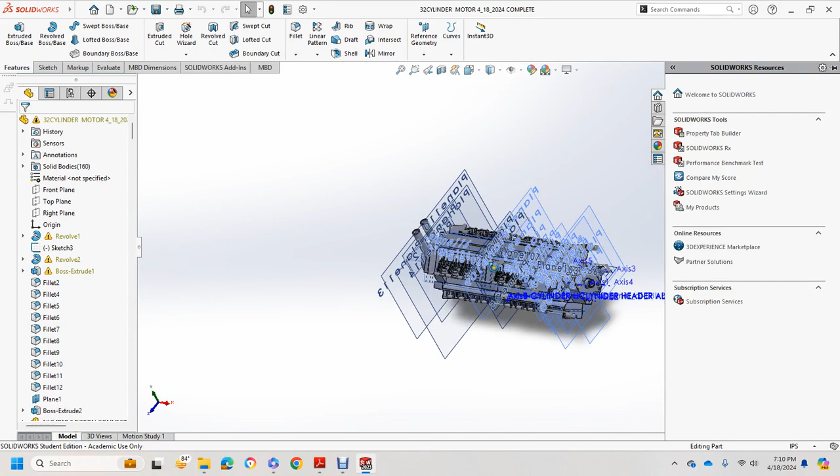Alright, hi, welcome to my X-type motor for a diesel engine locomotive. It's 32 cylinders, 8 cylinders on each bank, 8 cylinder length bank. Each head block has 8 cylinders.

Zooming in on the front. This is upright position. Scavenger highlighted in orange here. Scavenger, timing pulley belt, water pump over here on the other belt. These are the pulleys on the corners. The cones are turbochargers. This link path right here, that's orange.

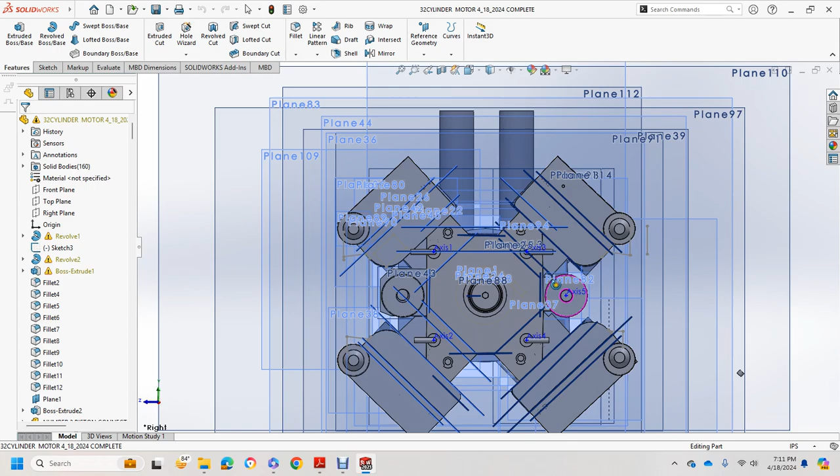A little line goes into the head bank. Those are turbochargers, they take the turbochargers into the air intake manifold. So here's the governor in the front, and then we'll show you what the governor looks like. This is the governor, we'll look at the cross section now.

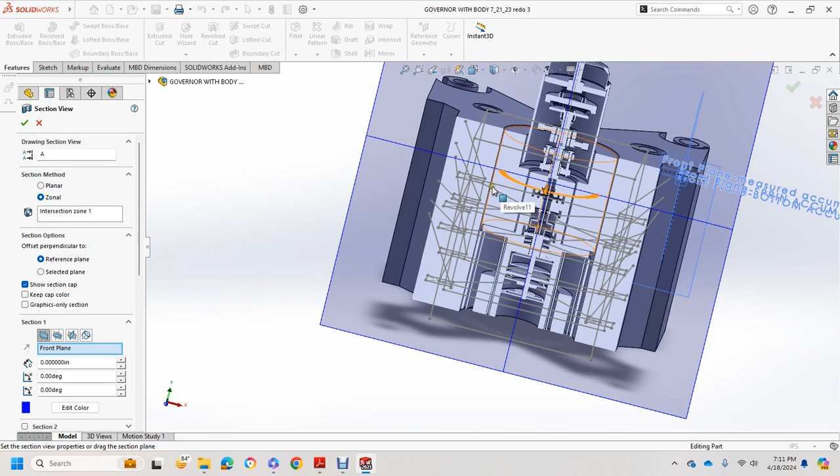So this is the middle, and we have the stem, and then the accumulator pistons come in these oil paths, and then they fill in the oil. There's a workaround float, and then it goes over here and fills with oil. And this is timing spring belts.

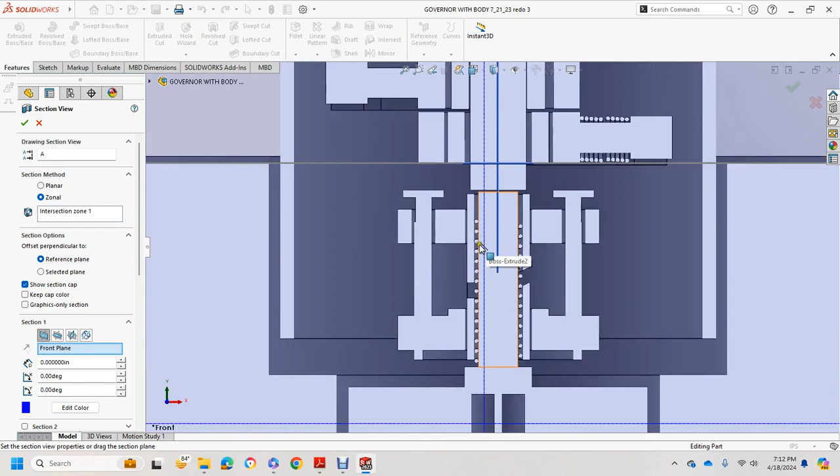You can see the springs, and then these are flyweights, and then this is a pressure crank-case regulator adjustable by this nut right here. And then on the drawing you see 4 control stands.

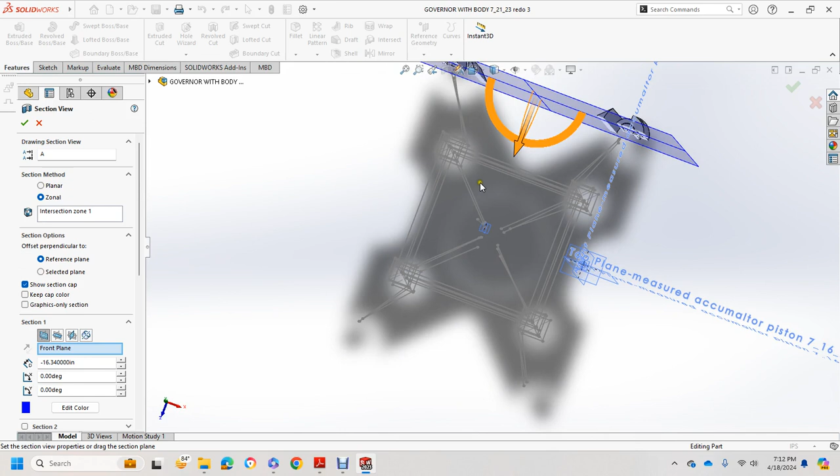They go over the X-type motor, and then you can turn the square off, so there's no more fuel going into the center, which is also for the throttle linkage control.

So over here on the more right, it's a little bit different incline. You see the accumulator pistons, power piston, the different blocks and the sleeves. And then we're going to go back to the X-type motor.

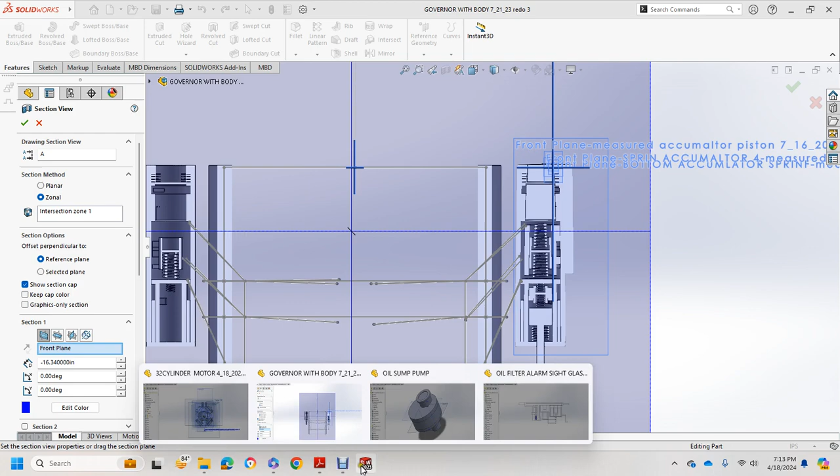I gotta close out of section view before it does that.

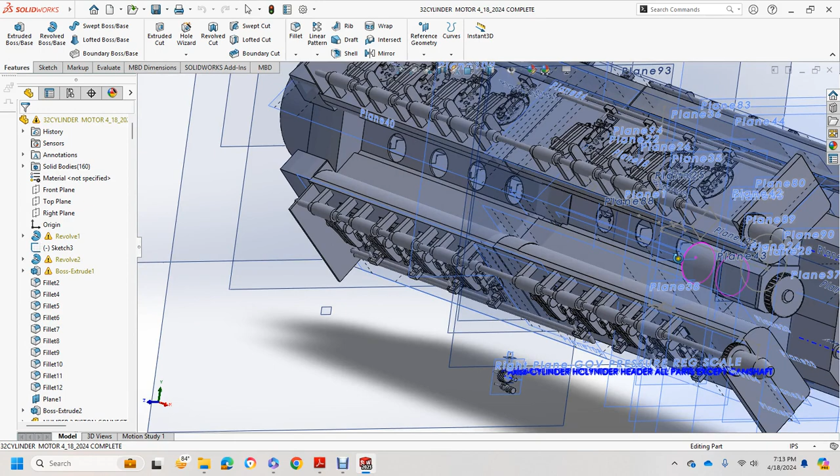Okay, so here's the X-type motor. It's got cylinders over here, water gear. This one on the left is the oil. This one on the right is the water, and those are going to fill each of these wet banks.

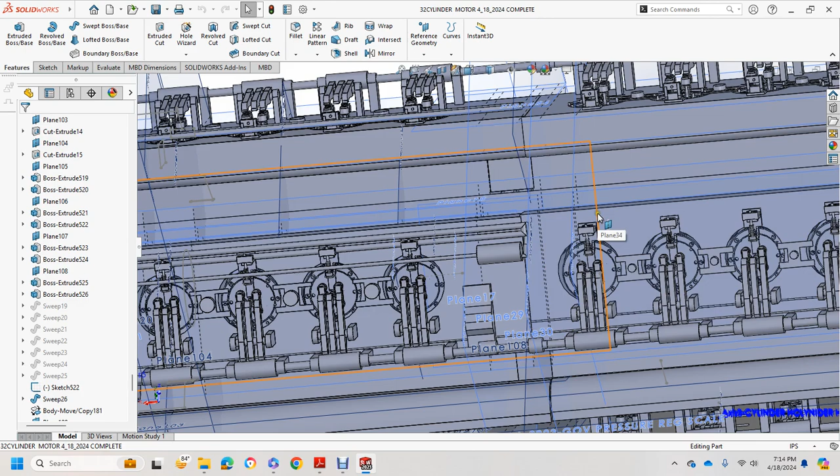And then you have your camshafts, rocker arms, crab bolts, rocker arms, springs. This is your throttle linkage right there. And those are done 4 times over.

And then we're going to look at the back. This is basically another way for the combustion to go out the exhaust tubes. And then this is the drive, it adds to a coupler.

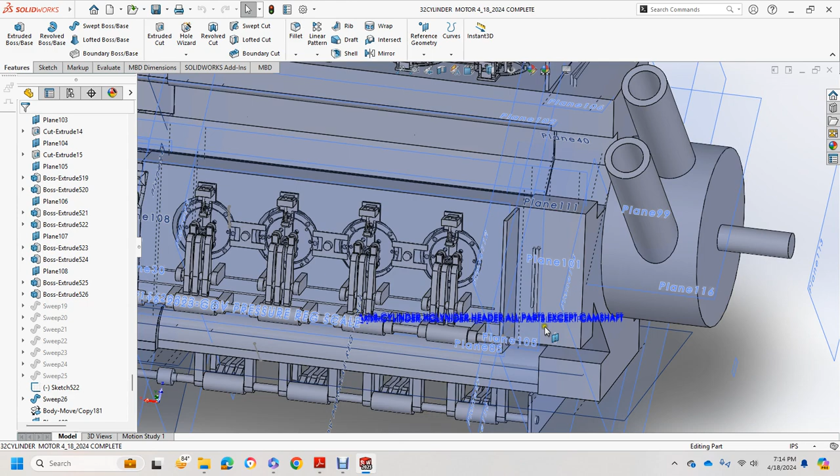I'll show you, let's go to the right side here. Alright, this is... we'll go to the left side then.

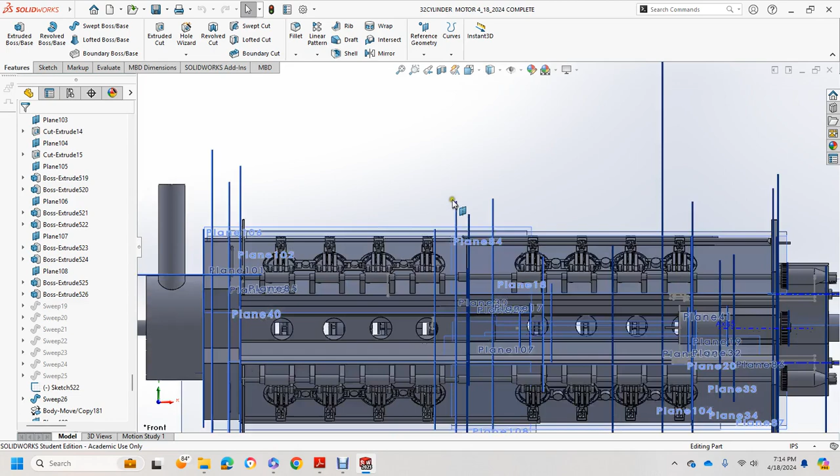Okay, so here is the X-type motor to the side. I'm going to show you my original scratch drawing. So we have the pressure plate and the scavenger pump, the oil from the governor, and then that goes into...

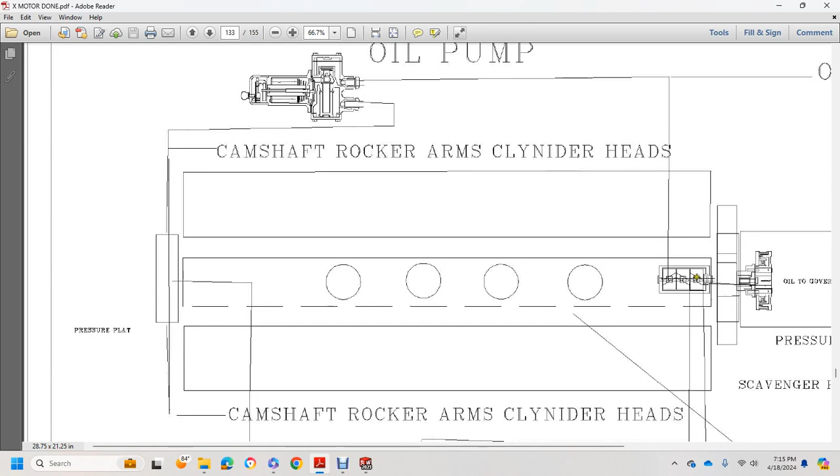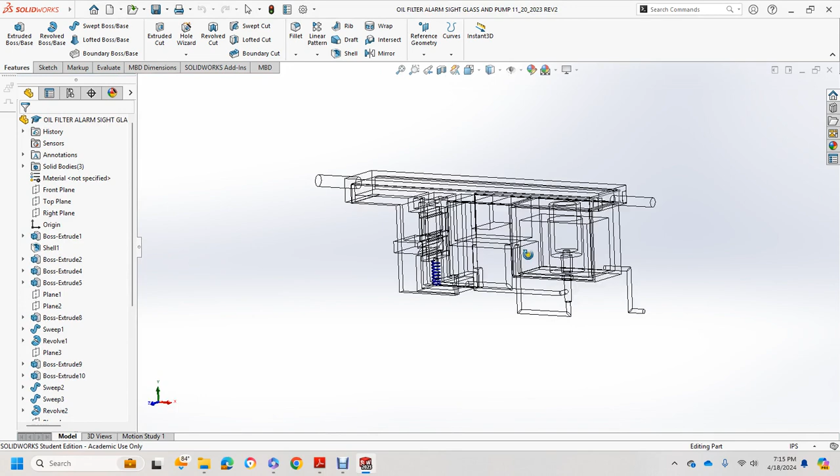So this is basically an oil filter with an oil pump, and then over here is a switch. So if the oil runs low, it will shoot, and then the sight glass, which would be in this column right here, and we'll just go... this is 3D here, shows the lines coming out.

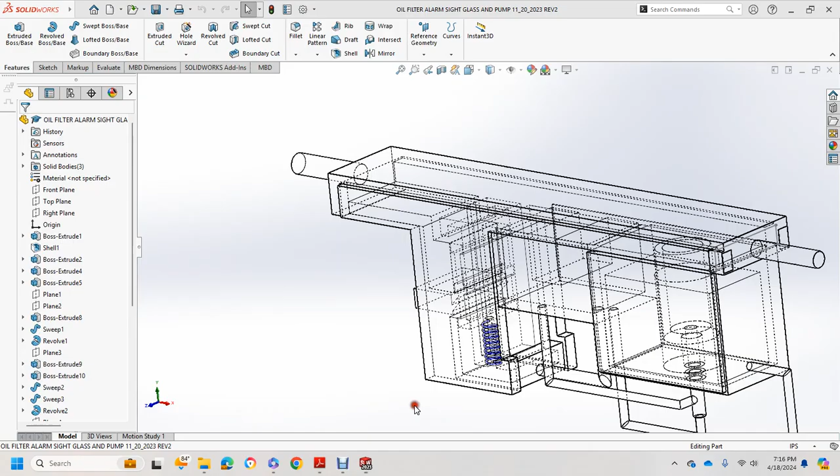We'll also show you the oil sump pump section. This is basically in the oil pan, it sumps it up to the back, and then we have the governor.

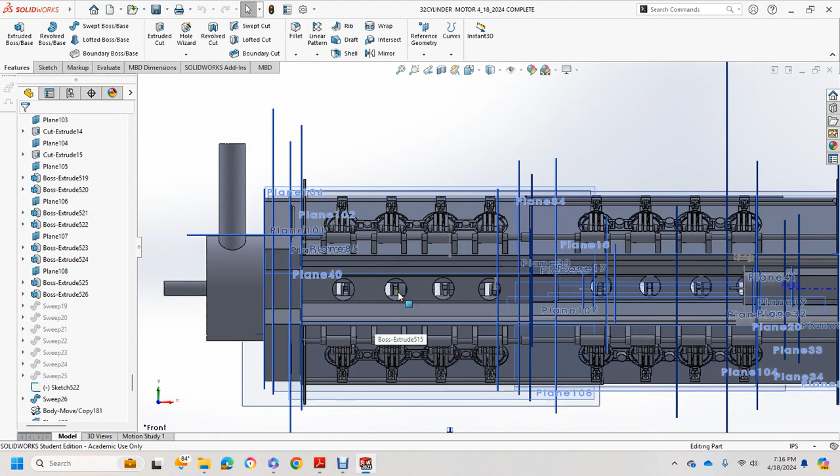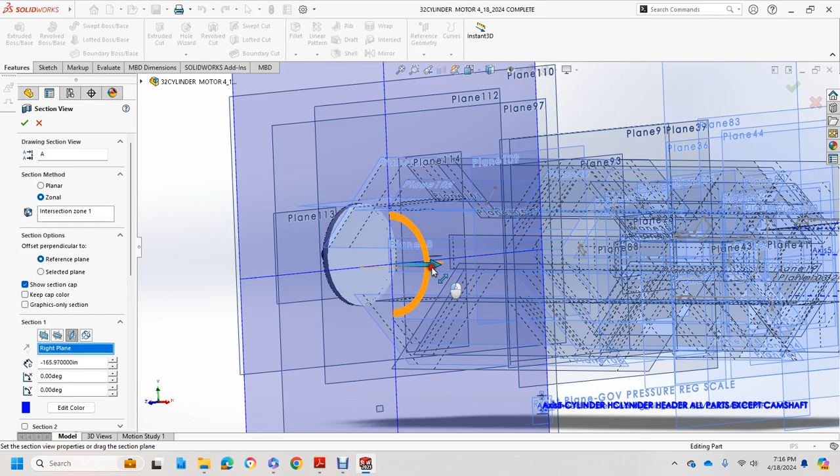So let's do a sectional view. We'll start from this end. So we have the back rear shaft, which connects to the coupler of the main generator. We have an exhaust room, one fan, two fans, a block, a pathway from the exhaust to the fan belt.

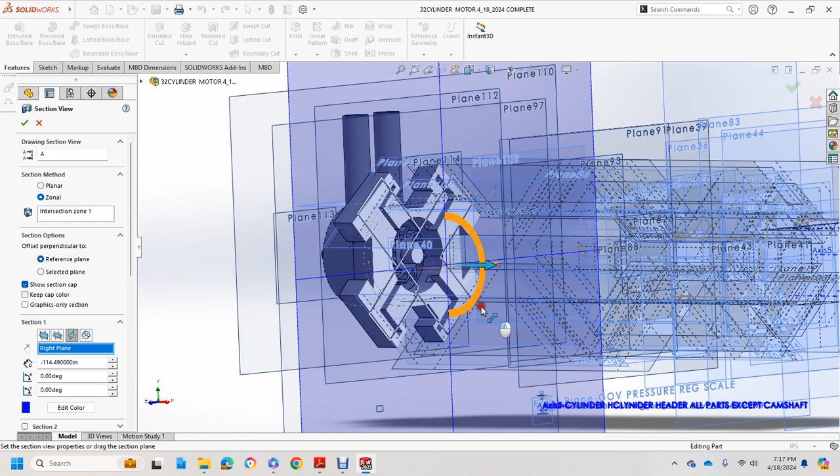And then it goes into these thin lines, are your fuel lines right there. These are the fuel lines that run to each bank. There's also an oil line. And then once you get to here, we start reaching the end of the rear of the head block.

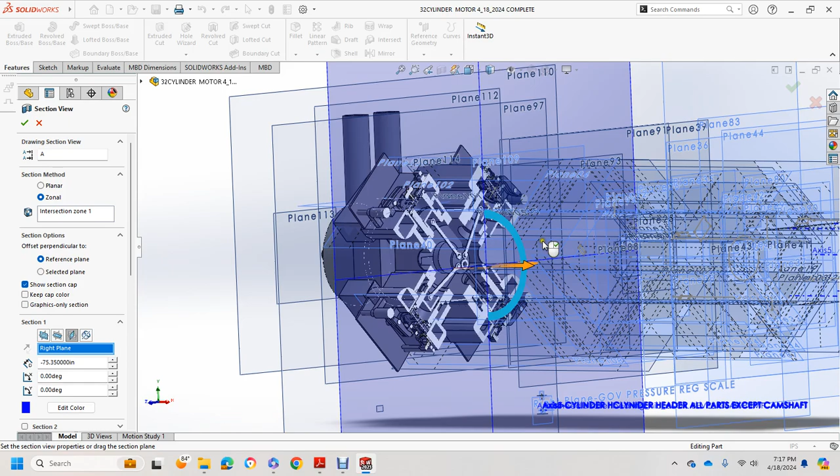So you see the cam lobe, and the pocket inside the cylinder liner, which fills up back into the air intake over here. That's cut extrude 11, and that's on every cylinder bank. There's 4 valves to each header.

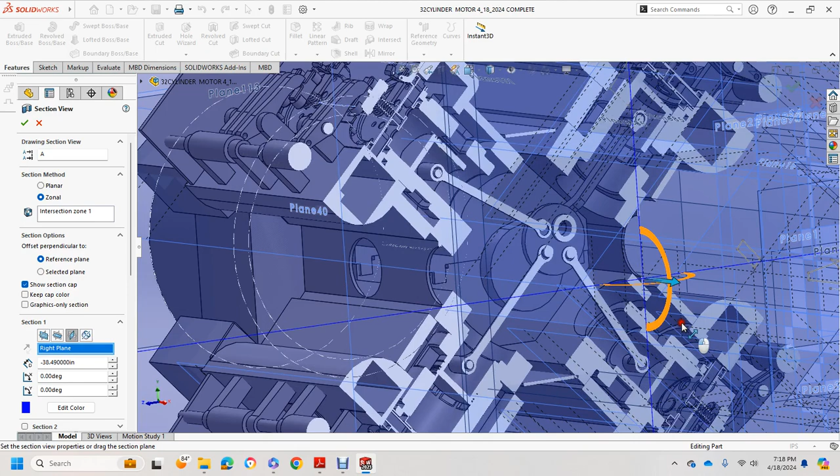And then we keep pulling through. We move on to another rocker arm, and then we move in. And this is so we're getting 4 cylinders a bank.

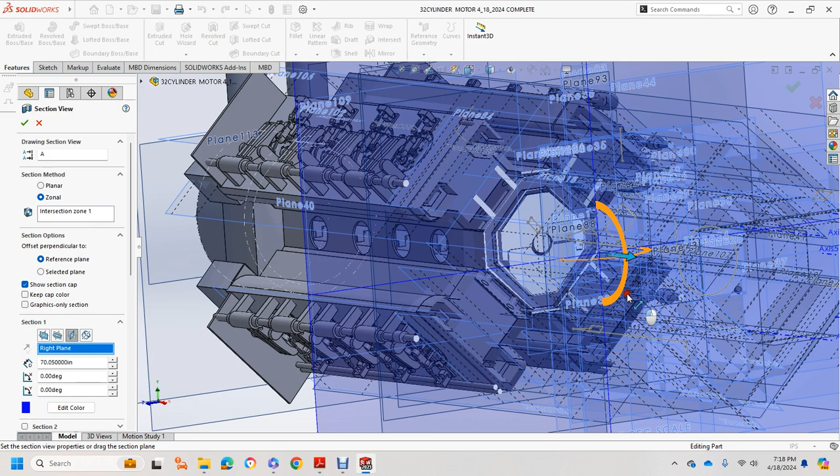Each block, and then as we move forward, there's a slight gap in between here where it picks up a frame. That's the frame, with a frame where the head backs are screwed on. There's also a middle part to that, so it's framed in the middle as well.

And then I believe we should hit a harmonic balancer. This right here, there's your harmonic balancer. There's 4 plates in that. And now we basically got our 4 cylinders. I did mid saves from the original 4-cylinder X-Type motor, so I basically worked from that.

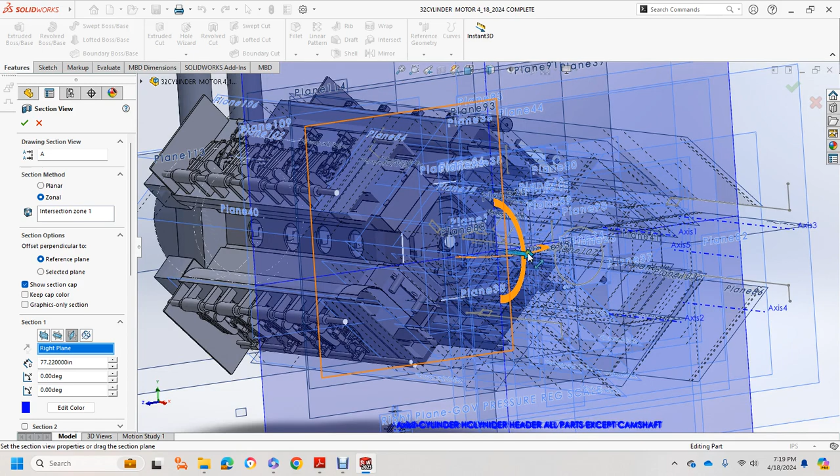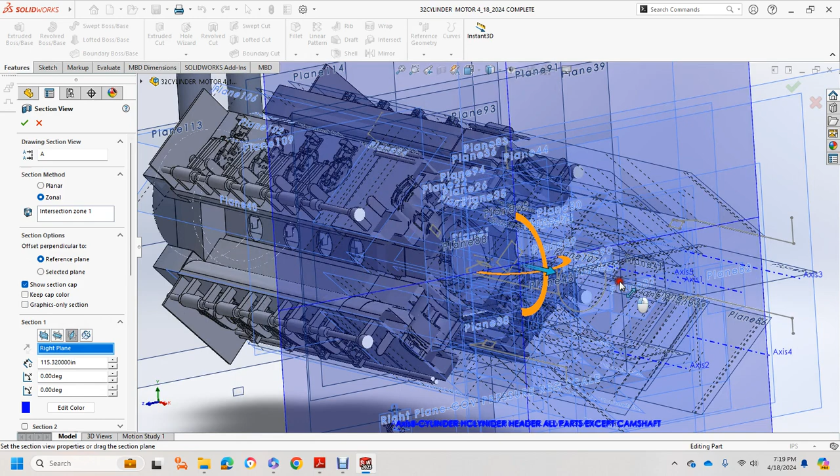And then we reach more sectional views, and then back up to speed, up to here. We reach the cylinder liner rocker arm.

Now here we see the scavenger pump, which is oil bevel gear. There's a few oil bevel gear. There's mounting holes in the back, so you put the gear inside there, and then that comes out. And then it has a cage around the harmonic balancer.

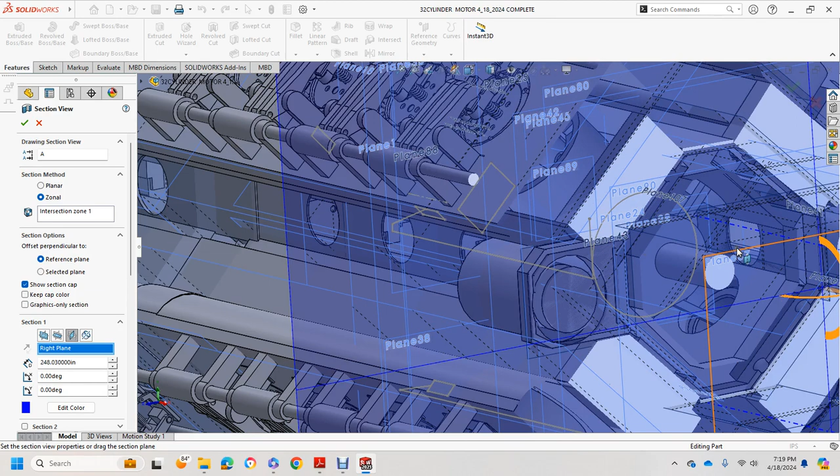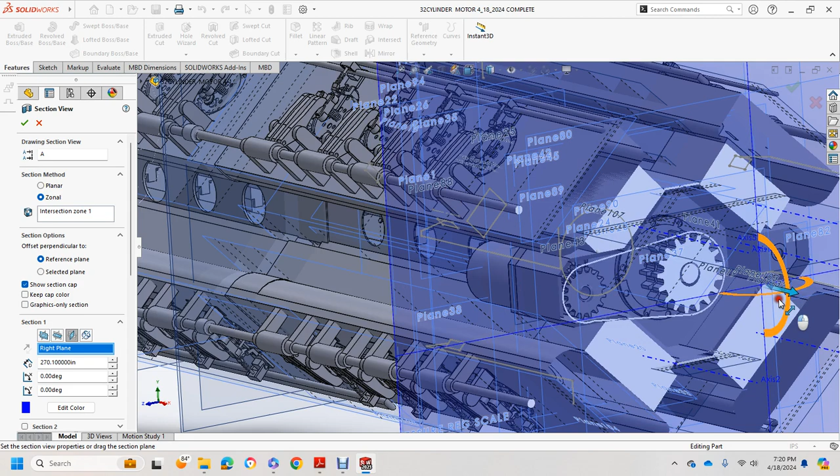So we did a frame from the scavenger, and then it goes into harmonic balancer, and then there's an internal gear which turns this on a chain, which I doubled up just in case there should be any problem with tightness and the control of that belt. So that's shown by a generic belt that I drew. I don't know how to use the belt feature yet.

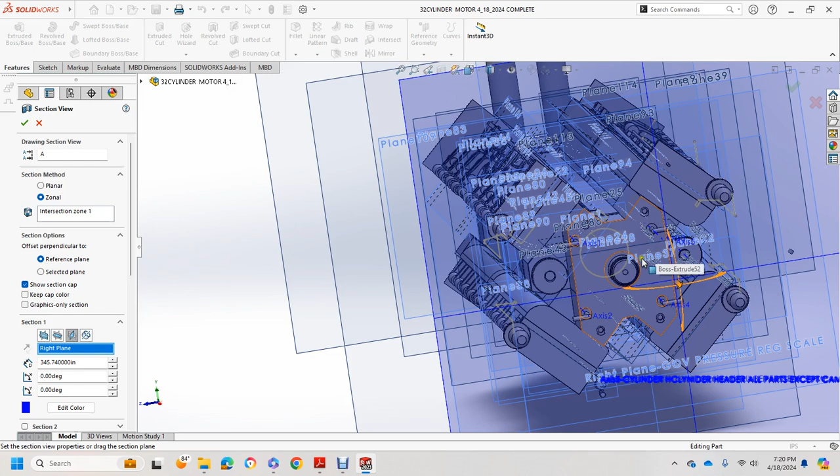And then it moves into the governor, and then faces up that way. This is a little awkward. I had to scale it down, or it's a little off scale, but we have the drawing. It's right here.

We showed you that drawing, so here we go. We showed you the governor, and basically that's that. And then you see the turbochargers are left blank.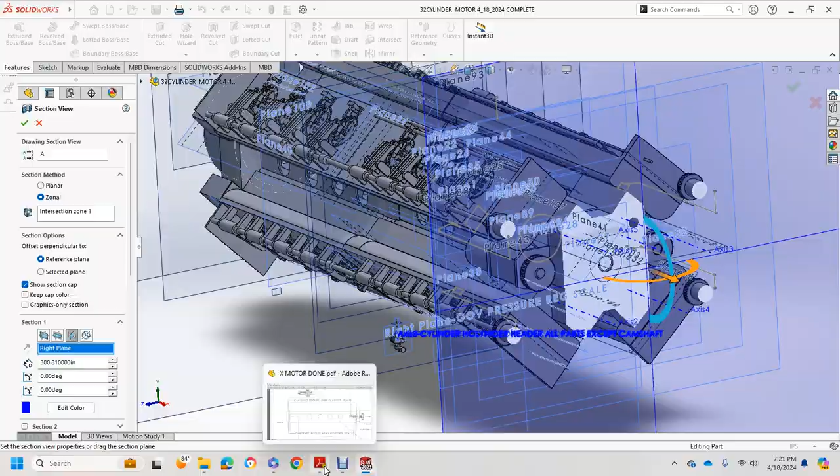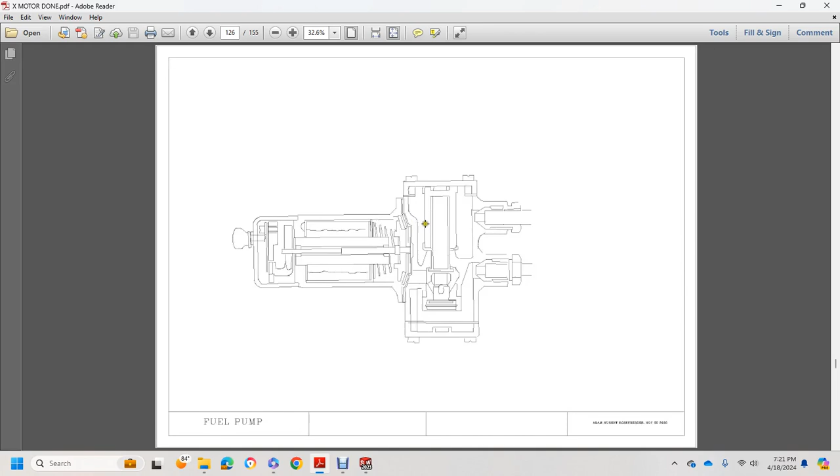This is a fuel pump. I'm pretty much going to use the same generic fuel pump that I got from this figure offline. So it's got a return in oil filter, and then this is 4-cylinder.

But now it's 16, so the pressure crank release regulator. This would be the pulley on it, and then so I drew this in AutoCAD first.

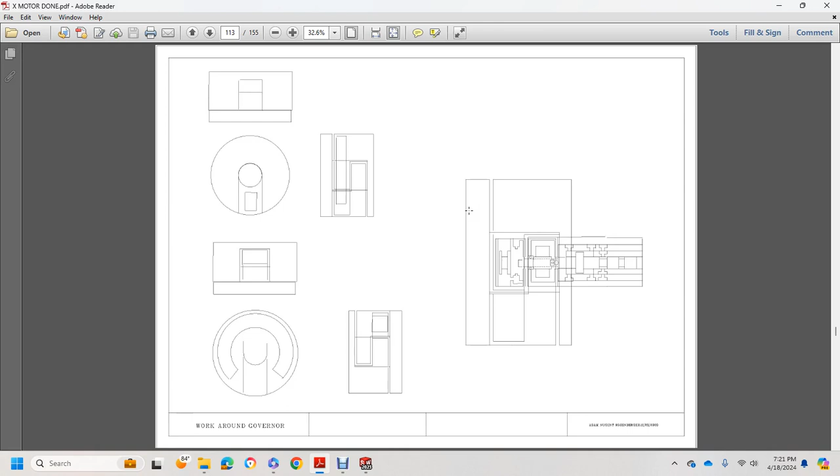This is a picture of the governor by itself from the half sight, and then the accumulators, fly weights, oil pump, fuel sight filter.

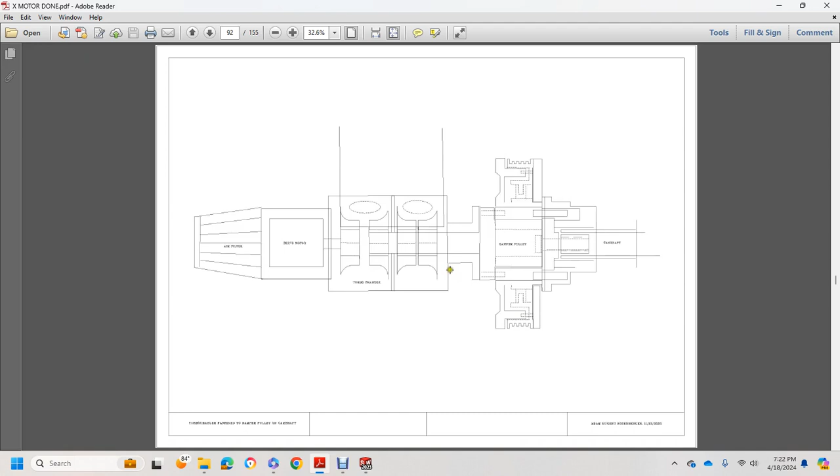And then you have the fan blower. There might be a little hole. This is only an extrusion. It's a cut extrude that I would have to draw 4 little holes and then cut extrude.

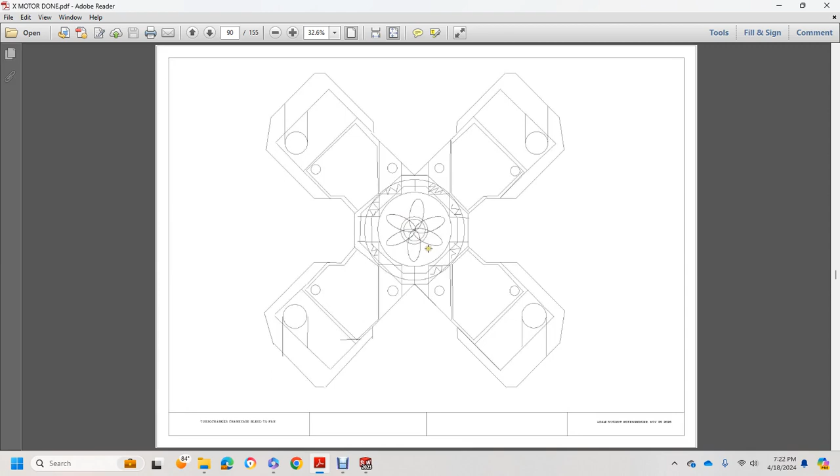But right now, that would go into the piston pocket into the liner, but I'm not sure how that bleeds. Also, there might be a rib in between the intake and the exhaust valve port for each line. Haven't really learned how to do ribs yet either.

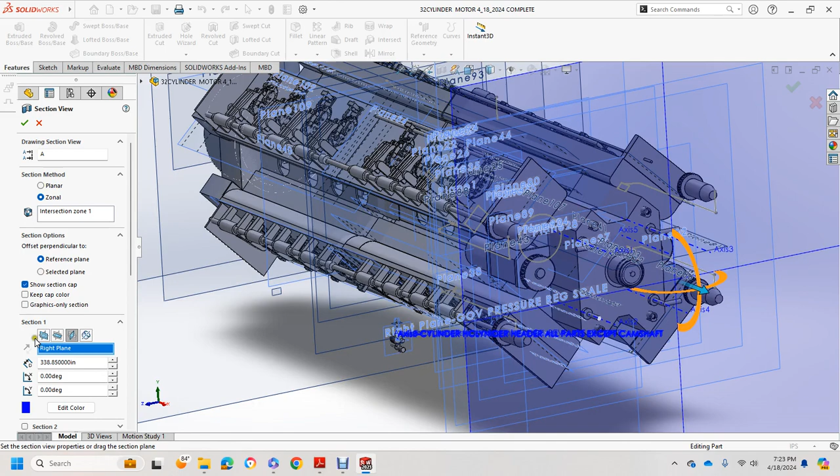Basically, the camshaft is done by a 2-stroke timing. So that's pretty much that. So here is the camshaft engine. Let's flip this this way. Maybe get a better look at this way.

So now we're looking at an angle. We can come back, we're at an angle. We have camshaft rockers. Shows that, and then it gets into the drivetrains.

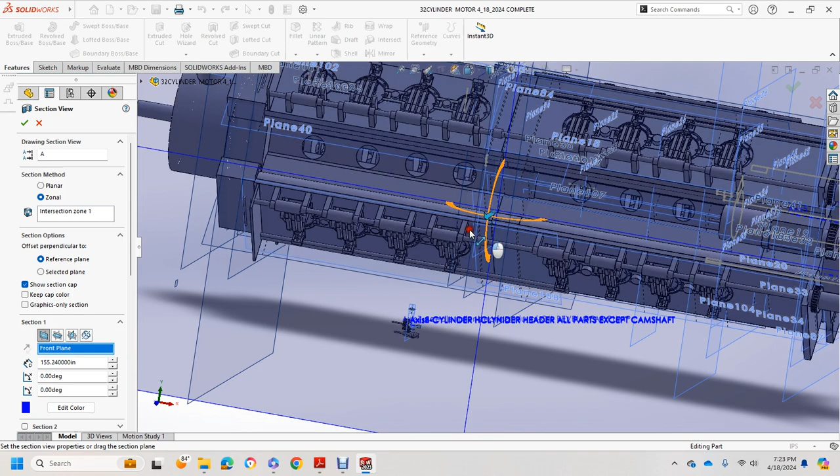So yeah, this is the X-type diesel motor. I did a little smaller exhaust fan on the back with 2 exhaust stacks, and it has 2 exhaust fans on it, one reverse, one flip the opposite way.

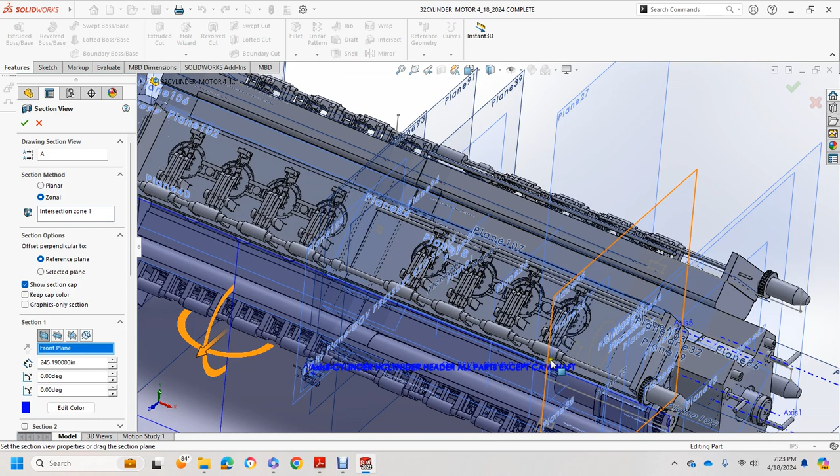This right here, this line right here from the turbocharger that I'm tracing, those are on each of the turbocharger. They go into this little square right here, and then go into the intake bank.

And that covers the X-type 32-cylinder motor. Thank you.